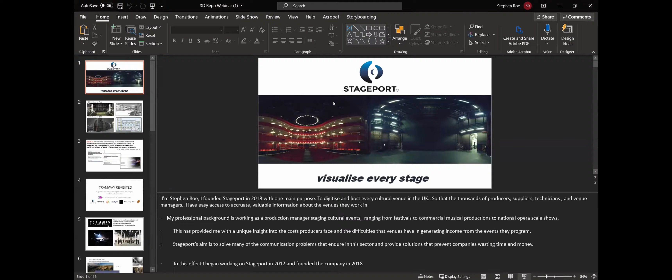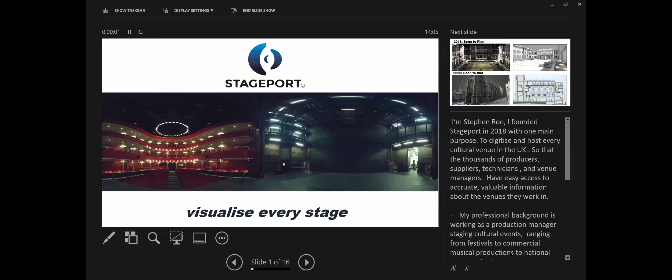Let's kick off. So I'll stop sharing my screen and Matthew, can you please share yours? In fact, Stephen rather - Stephen, sorry. I was going to say, you surprised me there. Yeah, sorry, it'll be over to Stephen. Thanks Justin, and thanks everyone for the opportunity to present today. My name's Stephen Roe. Can I just confirm you're getting the presentation there, guys? We're getting your notes as well, so you're not in... there we go, we're starting again. Okay, sorry about that. You've also got your text on the right-hand side, so we're still not in full presenter mode. Oh right, I am presenting here, so I'm not quite sure why that's happening. Let me just see, I'm sure we can all manage. So you're back to half - you're split 2/3, 1/3. Yeah, I'm not sure why that's happening. Listen, I'll just kick on. Yeah, you crack on, and I'm sure you're not going to be trying to read my notes. There's not much there anyway.

I founded Stageport in 2018 with one main purpose: to digitise and host every cultural venue in the UK, so that the thousands of producers, suppliers, technicians, and venue managers could all have easy access to accurate information about the venues they work in. My background is as a production manager, staging events ranging from festivals to commercial music to National Opera scale work, which has given me insight into the costs producers and venues face as they try to stage events. Stageport's main aim is to solve many of the communication problems that endure in the sector and provide solutions that companies can use to avoid wasting time and money.

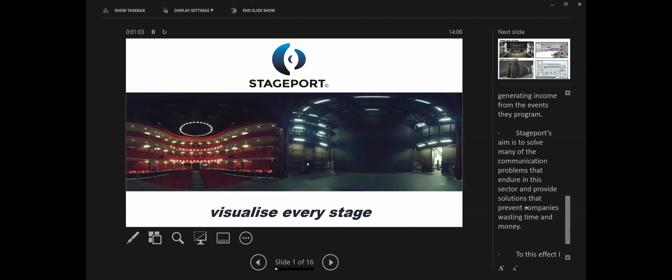Our approach to this problem of providing better communication tools started in 2018, really just as a scan-to-plan service, hosting point clouds online along with the models within those point clouds. Moving on towards 2020, our approach has definitely evolved, and we started looking more at technology geared towards building information modelling.

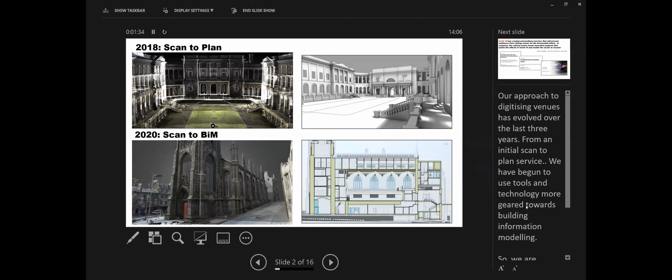Fast forward from 2018 to 2020, and obviously the pandemic struck, and along with every other sector, the cultural sector faced massive problems. The pandemic created extraordinary barriers that prevented audiences from visiting venues. So the research we'd been doing into BIM technology was brought into sharp focus when the pandemic struck in 2020, and we successfully applied to Innovate UK for funding to look at how building information modelling could help in the recovery of venues and producers operating in the cultural sector.

The project funded by Innovate UK was called Tramway Revisited. It involved seven companies working with Tramway, a multi-arts venue in Glasgow.

Tramway is a large multi-art space. It has a busy programme with 5 performance spaces.

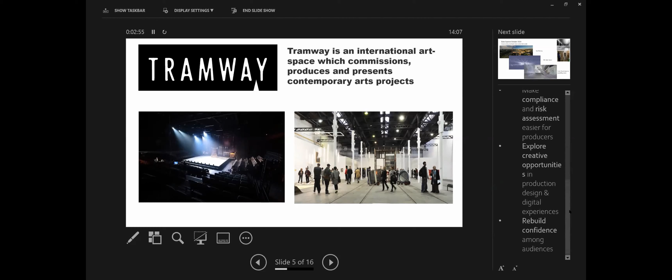The main aim of Tramway Revisited was to improve the sustainability of existing venues, make compliance and risk assessment easier for producers, and then to explore the opportunities in production design and digital experience design using the BIM models that we're aiming to create and host.

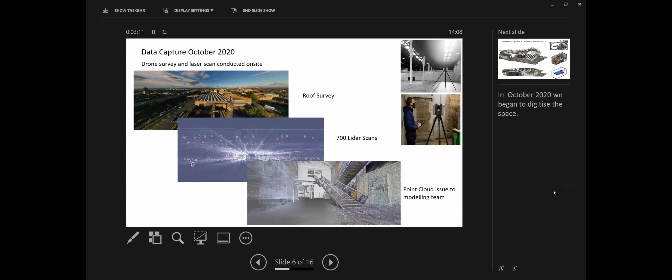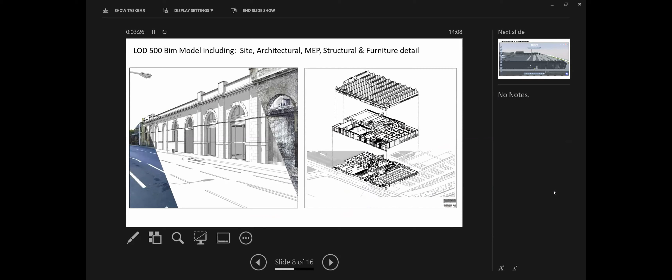The process to digitise Tramway involved some drone surveys, 700 LiDAR scans, and we exported the scans to the CAD team in November 2020. And the guys done an amazing job creating a level 500 BIM model, including the site, architecture, MEP, structural and furniture detail. So it's a fantastic resource.

Once we had the resource on the table, we then had the problem of how do we share this fantastic asset with non-BIM professionals around the table, as well as others that were more informed about how we can use the data that sits behind this model.

So we exported the model to 3D Repo in February to enable easier collaboration between the project team and with Tramway's own staff team.

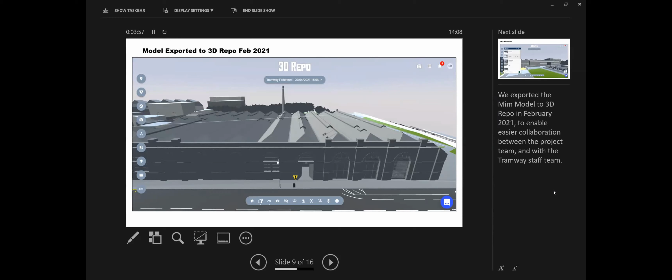The benefits of using Repo are found - again, we're very new to BIM technology ourselves, but we've found that using Repo has got a number of really easy benefits. One is the easy navigation tools within the environment, the ability to raise issues in the model.

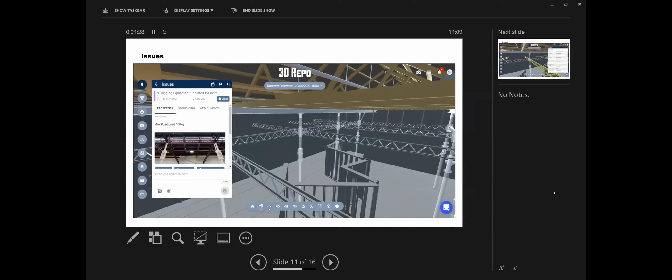The guys are busy planning cultural restart events, so there's installations and shows going into the venue in the next few months. So we're able to raise issues in there linked to the work that's been done on site. We're also able to access structural detail and really leverage the BIM data within the model, and this makes for better communication and better planning all round.

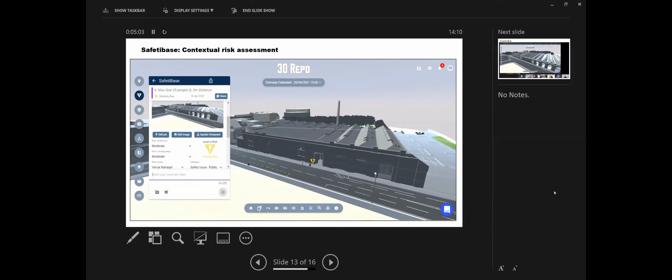What's been really fantastic has been the opportunity to use SafetiBase to provide us with contextual risk assessment. And we've got a couple of experienced health and safety professionals on the team, and they've been really impressed by this application in particular.

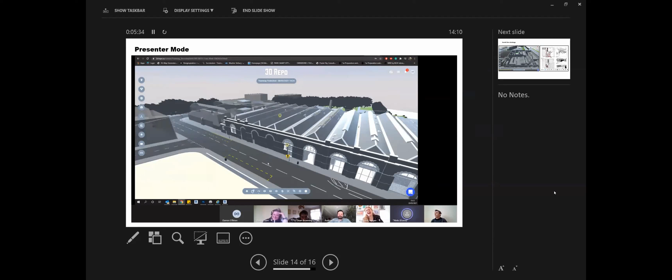One of the things we've managed to achieve through this collaboration has been to enable Tramway to develop their COVID strategy, which is vital in the first phase of the recovery from the impact of the pandemic on venues like Tramway. So being able to collaborate and come up with this 2-metre strategy that allows them to go back to operation is a fantastic outcome.

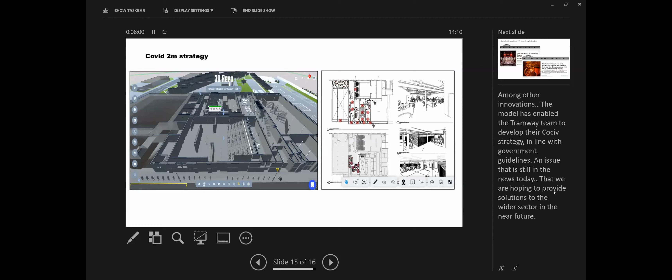And just to put that into context, this is even just this morning - we've still got uncertainty in the sector around how we recover from the impact of the pandemic. So digitising the venue, having the venue up in Repo, has really helped us to get to grips with the problems there, and we're looking forward to continue to use the technology in the months ahead.

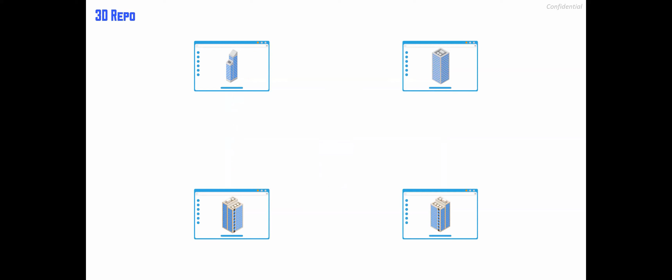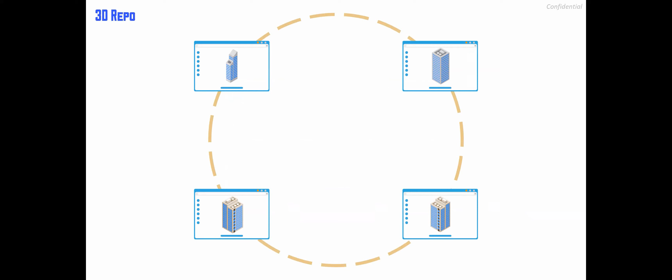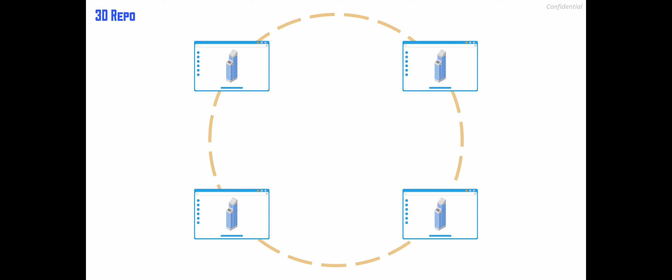So you think about it, okay, well, if that's the case, it's easier said than done probably. How does the scalability of it work, right? How do you make sure that, okay, if you take it from a single meeting room to, let's say, 15 people tuning in and each one of them opening a web browser to look at the BIM model, how do you make sure that the model and information being exchanged is in a circle, so everybody getting the same information, no one gets left out. But most importantly, how do you make sure that everybody's looking at the model that you want them to look at? Because it's so easy to get lost in the environment when you're not familiar with it.

But the most important thing, we're leaving communication right in the heart of it. We want to make sure that it's not a burden, it's actually a new tool that can help you communicate better. Just like all these video conferencing tools we are using to facilitate those meetings where 6 or 7 of us would be together. So how do you make it work, right?

If we look at the technological side of things, presenter mode is something that actually spun out as an idea. And we did the Innovate UK funded project for it, and we had a lot of beta testers and a lot of customers starting to adopt it. But the main issue that we found is the fact that, okay, when you go remote, that means you're going to be running a video, running audio.

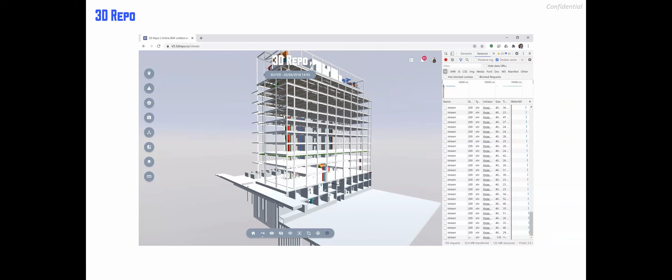So there will be a lot of payload on your network. You'll be downloading a lot of things, and your internet might be under a bit of strain. You may notice in here, this is an example federation, MEP and structural model, and you'll see there are loads of streams, loads of data exchange. You always question yourself, isn't it going to add a degree of complexity and maybe heavy loads on your internet bandwidth? Well, let's not deep dive into this idea without looking under the bonnet of it.

Let's look at the numbers, right? So you'll notice, for instance, the model we looked at earlier is one of the federations from our clients at Wood Wharf Project, Canary Wharf Group. The model we looked at just then was 115 megabytes, right?

But what's really beneficial is the ability, like I said, to put everybody in the driver's seat, right? So you are no longer sat there watching a video like many of you are doing right now and looking at what I'm presenting to you. You're able to interact with it yourself.

And if we look at the graph in here, we'll notice that when we do sound and screen sharing through, let's say, MS Teams, our actual network load is all over the place, right? We suddenly find ourselves in situations where you always ask, do you hear me? The picture is too pixelated, you can't actually see what's happening. But when you just resort to, let's say, a sound call, and instead of watching somebody navigating the model for you, you're being driven within the application itself, it actually reduces your payload across the internet bandwidth.

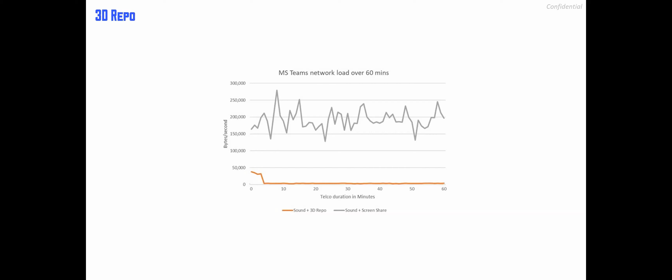So you'll notice, wow, excellent. So the issue that we're resolving here is that we're actually encouraging those individuals to work within that 3D BIM model environment. But most importantly, what we realize is that we are no longer having the same issues of the internet dropping out or you not being able to see the picture.

So it all sounds great. You might want to see it. I'll show you exactly how it works.

So right here, for instance, let's say I have a design coordination meeting. You'll notice there are 2 screens side by side. But this could also be me talking to my colleague who might be sat in Edinburgh or somewhere else, right? So when we dial in, we start our communication channel.

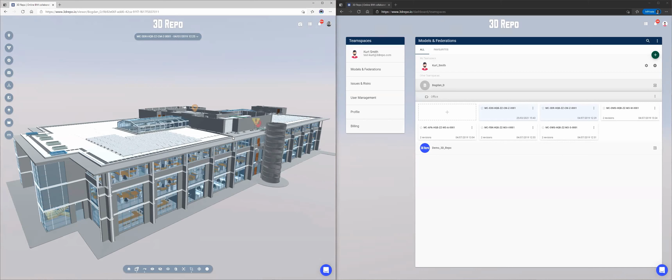And the good thing is, since you are in this environment, for my colleague who doesn't know how to do this whole BIM stuff, and everybody talks about it, and because software deployment is a problem, an issue, there are steep learning curves, I'm going to facilitate that for him. I'm going to make it a lot easier, right?

I'm going to go in and create my design coordination meeting. Let's say today is 29/04/2021. In fact, I'm going to start my presenter mode session, and I'm just going to copy that code and drop it into the description. The good thing is, since we're working in an environment that is not screen sharing, everything is then intact and audited. Right, so this is going to be an in-progress issue, and this is going to be my design coordination.

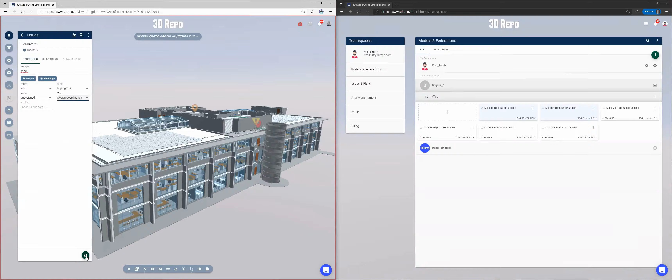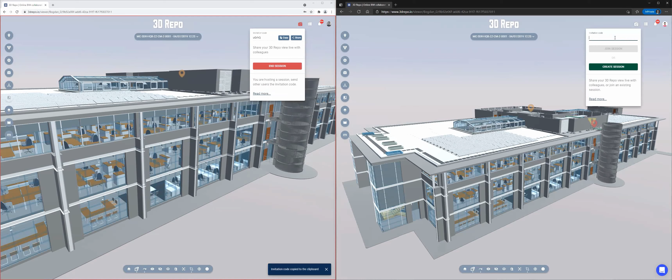So for instance, okay, let's jump into the presenter mode itself, right? We're together in the same meeting, we're trying to figure things out, we're trying to understand stuff. So whilst it's easier for me to navigate the model and things, for others it may not be the case, right? So when I initiate my actual presenter mode, I start my session, I can copy my code, I can share the URL link if I want to, but the other individual can just quite easily copy the code in there and then join the session.

What happens next is that whilst I'm working remotely, I may be communicating with somebody elsewhere. So for instance, let's say I might go and say, actually, do you want to go and have a look at an issue with me, right?

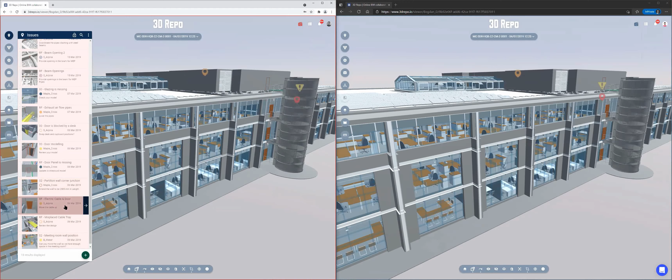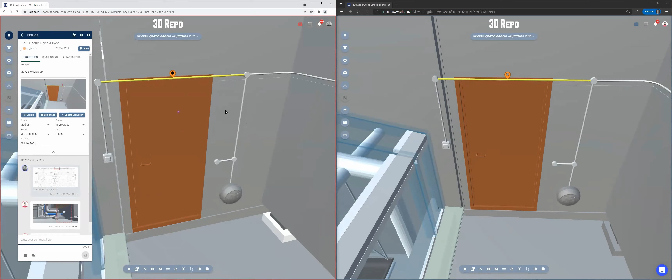There is an issue that I want addressed, so it's this electrical cable and door. When we go there, it's no longer just me showing a screen and the other person looking at it, trying to figure out what it is. It's me navigating the model for them also, so as I fly around, as I'm showing things, they'll be getting exactly the same picture. For instance, I might point out, okay, this is the actual door I'm talking about.

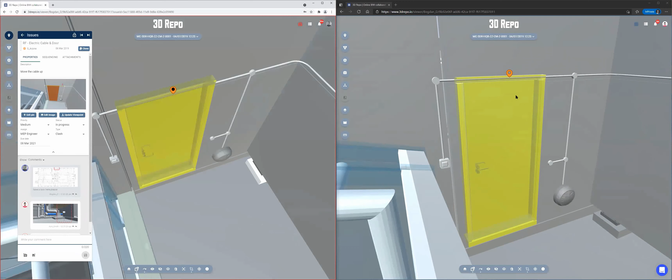When you click on it, the object selection will come through to the other individual as well. And if you point out an issue and say, hey, there's a cable clashing or something else happening, what's really nice is that you can add a level of information exchange that often goes unnoticed. Whilst I'm in this environment, I might say, okay, hold on, I just have a question. If he's saying there's an issue with this cable, why is it coming from that?

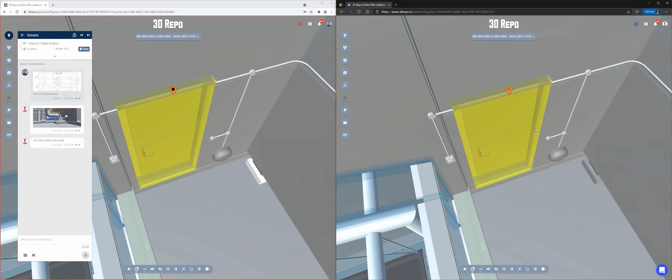I can always leave the meeting, and whilst I'm in the environment, I'm no longer looking at screen share. What I'm able to do next is navigate out and look around the model, and maybe notice another thing and say, oh, actually, there's some sort of ductwork set right in front of this door. I think there might be another issue we want to resolve as well.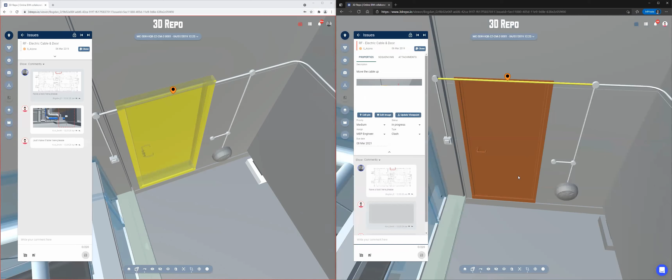The good thing is, when we go back into our issues environment, there's a full audit trail for everything. I might go back in here and point to something else, and say, this is my comment. My comment might not be related to that, but because I'm looking at the BIM model, not your screen share, I might say, actually, have a look in here. This looks rather odd. To me, it looks like there's some sort of MEP equipment in front of the door as well. So we might move the cable, but maybe we need to move the door too, because there's a bigger issue here.

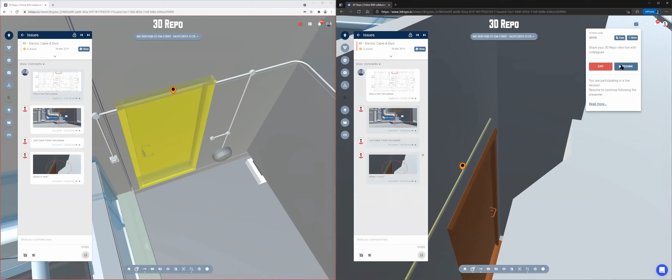So this is the comment that I add, and that comment instantly comes back to me on the other side of the world. Once I've identified something, I might have added extra value to my design coordination. I then go on and say, okay, let's jump back into the environment, let's go back to the meeting so we can crack on, so I don't lose track of the agenda.

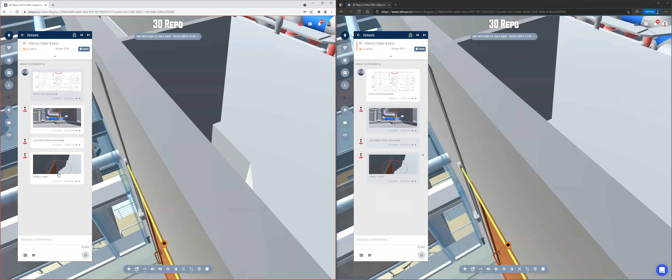The person leading the meeting might say, oh, actually, you are right, there is an interesting comment here, and I want to share that with everyone else. Because everybody else is following me, I can click on that comment and have a look at what that individual is actually trying to articulate. As it goes on, as you all start communicating, you realize it's no longer you throwing suggestions across the room table, and then when you leave the meeting, suddenly scratching your head thinking, what is it we wanted to do. You can always come back to it whenever you want.

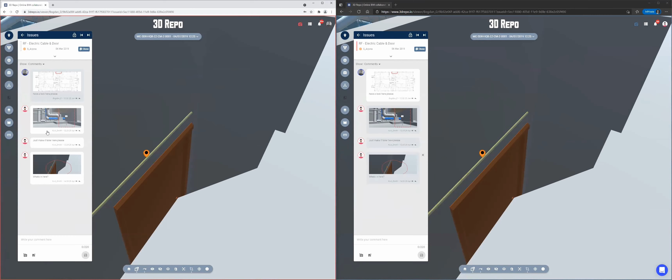Those individuals working simultaneously with you can also, at any moment in time, step away, identify something else, and add some other comment as well. You might say, okay, he's pointing to something else also, let's quickly go and have a look at that. And that's the real value in this.

It's, once again, the ability, at its easiest concept, to drive that BIM adoption with the rest of the project team, not by doing the work for them, but by doing the work with them, and making the actual workflows rather simple and straightforward. They're all live, not too dissimilar to exchanging information on the likes of WhatsApp or Facebook. So there are no steep learning curves, and everything is in the web browser, which we're all used to.

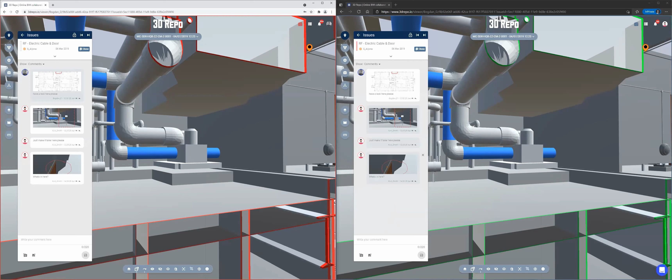Thanks for that, Bogdan. Sort of proving the case for, what is it they say, never work with animals and children and never demo live tech. Very amicably done, sir.

Thank you for the introduction, and thank you to everybody on the call for your time. I'm Matt Gough, Innovation Director for a company called Mace. We are an international construction and consultancy company with a clear purpose to redefine the boundaries of ambition for our industry. We seek to differentiate in three core areas: net zero carbon and how we can help accelerate the built environment's response to the climate emergency; construction to production, changing the business model in which we all operate; and all of that enabled by a transformation in how we manage digital and data within both our business and the industry at large.

Across the globe, our people are adopting a different mindset to develop, adopt and deploy technology across all parts of the project lifecycle. I've been at Mace for 10 years and witnessed rapid change in our adoption of technology, and that change continues to accelerate. Globally, we're becoming more efficient and productive every day through technology, whether flying drones, augmented reality, virtual reality, 360 cameras, sensors, or automation. We're designing, estimating and delivering in digital, delivering better outcomes for our clients as a result.

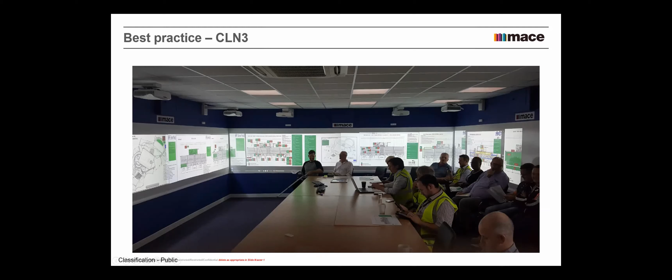What you can see here is our current, or it was 2 years ago, best practice example of what we call a production control room. This is on a hyperscale data center in Ireland, where we digitized, connected and integrated the entire construction workflow from design right through to handover and operation of the building. We made people's work easier and efficient by democratizing data and integrating all the on-site processes using a digital platform, allowing people to work faster and access the right information at the right time. Our intention as a business is to create a standard, repeatable way of rolling that out on any construction project, whether ones we're responsible for delivering, or ones we manage in part through our consultancy business.

In order to do that, we're currently working on one of the Innovate UK demonstrator projects under the Transforming Construction sector deal, called the AEC Production Control Room. Our intention is to build a repeatable, scalable, plug-and-play management reporting system that automates the reporting cycle, enabling high frequency, fact-based project management and control at all levels. We'll be getting data from any systems, whether our clients' and professional teams' proprietary systems, or our suppliers' own tools and software, and automatically collating it into a single reporting focal point for the project. The aim is establishing one source of truth for all, making data accessible anytime via any browser, plus a physical control room location, probably within some form of site office.

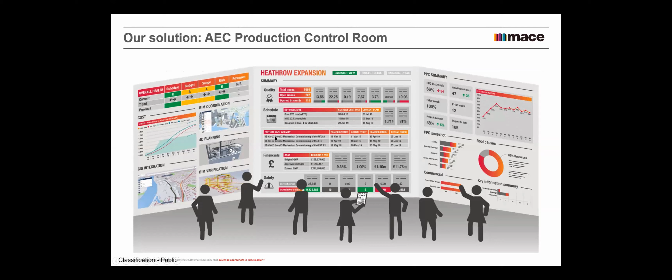Our team, in order to pull this together - I should give a shout out at this point. This is Mace working with 3D Repo, Evercam and Mission Room as our UK startup SMEs, and UCL and Imperial College as our research and academic partners.

So our aim is twofold, really. Can we unlock the business model and transformation required to get data in real time and break that cultural, behavioral barrier around sharing? And can we create a system to be able to take care of the technology part?

And we recognize that technology is only part of the solution here. It's the behavioral and the cultural part that's probably going to make this one win or lose.

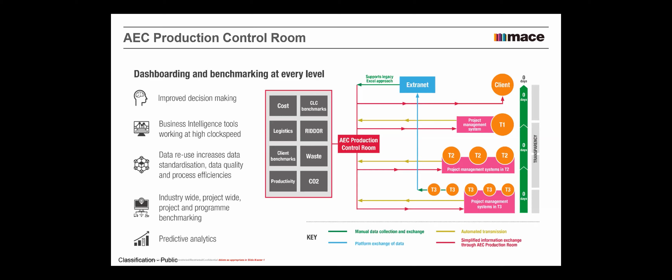But in essence, what we're trying to illustrate here is the fact that through smart API management, a decent approach to cloud, and probably some ways and means of smart machine learning, AI over the top in terms of analytics, we should be able to unlock all tiers of the supply chain through project delivery to create a real-time management dashboard information to allow us to achieve better outcomes for our clients.

Within our Innovate UK project, we have some deliverables, and the intention is that we share these widely with industry. So the three main things that I would say we're sort of shooting for here.

Firstly, as an industry, we've got pretty good at managing design information, with the advent of Uniclass, etc. The continuing onslaught of Autodesk and the BIM platforms and products means that the front end of projects, we tend to be much better now at managing information, as probably demonstrated just then by our friends at 3D Repo. As soon as we get into delivery, all bets tend to be off.

So we're talking about extending the ISO employer's information requirements concept out into project control projects. So how do we actually manage the site in a consistent way? And can we create some standardization around that?

We're obviously not building new systems. We're planning on APIing and working with existing systems. And as we build those APIs, we intend to open source and provide those on GitHub so that the whole of the industry can benefit from them.

And then lastly, if we can unlock project information at this scale, we're working with particularly government clients around how do we start to create the pool or database, let's say, of industry-wide benchmark data to allow the whole industry to get better.

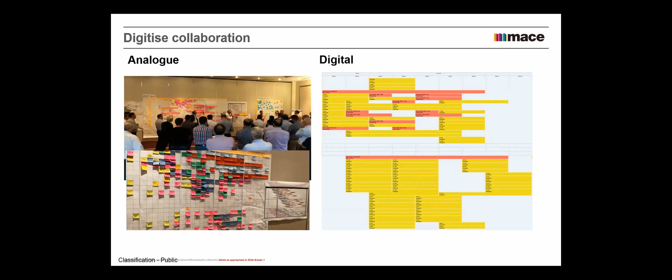We've already made some strides as an industry in terms of how we digitize that. But what we really start to lose when we move from that physical to the digital is perhaps the immersive element of activity. So what we're really aiming at is creating an immersive environment in which all operatives and supply chain partners, etc., can partake.

So here's the first iteration of one of our production control rooms. This is on a project that Mace is currently running down in Paddington. And we're tapping into a few additional things here that we wouldn't have been doing in the past or able to do before this project.

So firstly, the advent of 4D collaboration. So the production control room is tapping into our 4D sequencing. So we're able to use the BIM model more effectively in short-term planning sessions.

There's a huge amount of effort going into enriching data. So the 3D models that we get, and also a lot of the data that the sites generate, is not always at the quality we need at source. So the production control room is really allowing us to perhaps take a bit more control and add context to that data without having to go back to the authoring tools.

And then, the main bit, collaboration and dissemination. So creating an environment such as this where you're able to get people comfortable with what is being proposed on the project, what's happening in terms of sequencing, what key activities, etc., are coming next, and getting comfortable around the plan is proving to be really effective in terms of driving productivity.

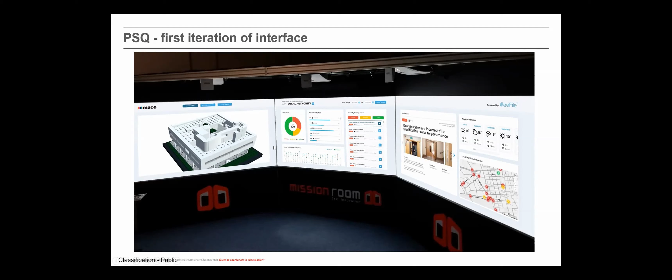It's not easy. I mean, we all work in the industry and we all recognize that our digital transformation and adoption is still, in some respects, in its infancy, but it's getting faster.

Some of the real tricky problems we're trying to tackle here - it's a good reason for using the word elephant - is a lot around the quality of the data and the disconnectedness of the data. There's a huge amount of training and upskilling required for us as an industry in order to create the consistency we need if we're going to unlock the productivity improvements that are on the table. But where we're doing it, the productivity improvements are possible.

Here's some statistics from a project that Mace is working on where we have managed to integrate our data, and we've done our part to address this. As you can see, there's significant ROI in terms of improving productivity as a result of a more connected,

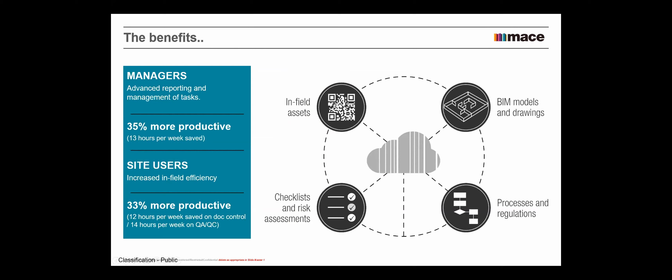holistic view of digital platforms and systems on projects. So that's the dream - we're making good headway. There's always more to be done, but we're very much looking forward to having a successful year and working with 3D Repo and the team to deliver some real meaningful change.

Matt, thanks very much, and thanks for the immersive elephant, which we'll all look out for in future. Even you couldn't say it, see? So, Lawrence, it's over to you to share your screen. Thank you very much, I'm just going to share the screen right now.

Thank you and welcome to the Luminova presentation of Hyperview. I'm Lawrence Matthews, the Managing Director of Luminova. Just a little bit of background about us.

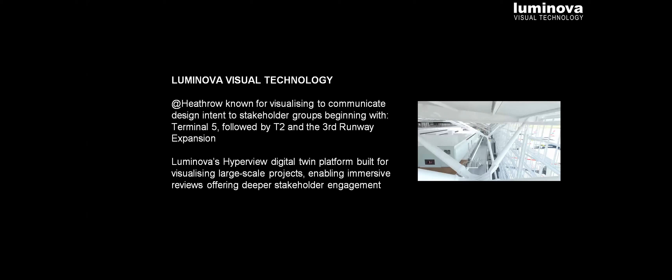At Heathrow, we have worked for a long time, and we're known for visualizing to communicate the design intent to stakeholder groups. We began that with Terminal 5 back in 2005, followed by Terminal 2, which we started when the old Terminal 2 was being demolished, and worked right through the construction program. We also then moved on to the third runway expansion project, working on runways, roads and buildings, all with the purpose to communicate to stakeholder groups.

Fast forward to 2021, Luminova has developed the new Hyperview digital twin platform, which is built for visualizing large-scale projects, enabling immersive reviews and offering deeper stakeholder engagement.

The key points I'm going to run over today are these: one of the main parts that makes it work is the BIM Live Link integration we have with 3D Repo, which helps us handle large schemes. I'm going to show you some high fidelity visuals in a gaming environment in real time, and also some immersive examples, and touch on the distributable package element of this application.

So here's how it works, and for our purposes it begins with models, and these models are either created for or by the client. For Hyperview, those models get pushed into 3D Repo, and then they are federated. Between then and actually creating a desktop application, we need to configure - so we create a BIM Live Link, which is the integration we have to 3D Repo.

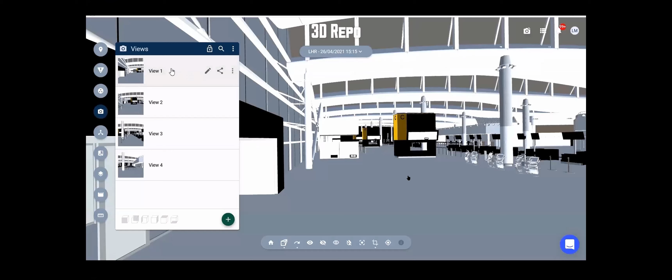So back to the models - we've got models which we pushed into 3D Repo as stage 1, and I'm just going to show you an example of that. Here we have a part of Heathrow Terminal 2, which is being pushed into 3D Repo. We've set up 4 simple views.

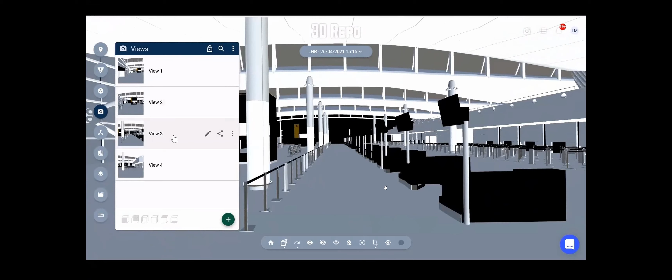You can see quite a lot of gaps here, which we would fill in the Hyperview if that information isn't available. So we're now just moving between these four views or scenes. We're at the fast bag drop at the moment, and we'll end up back at the premium check-in. You'll see a deployed Hyperview version of this in a moment.

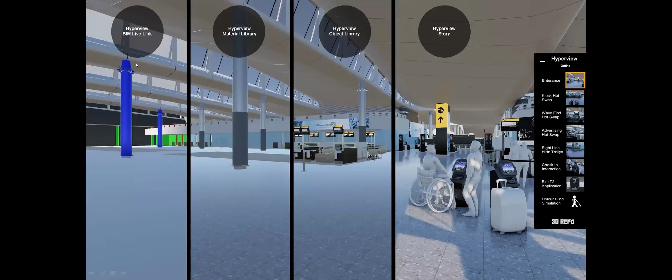The first thing we do is we set up the BIM live link, and then that data from 3D Repo is downloaded into the Hyperview as an instance or a session, and that's what you get first.

What we then do is we allocate materials to the geometrical objects that are downloaded, and then we move on to the Hyperview object library and fill the gaps. What we're really doing there is adding things like media, wayfinding, trolleys, things you're not going to find in the BIM model, or you may, or there might be parts that aren't actually loaded as yet.

And then the final part is telling the story. So what we do here is create an appropriate user interface which guides the user through the story. We add people with motion capture behavior for realism, and of course lighting.

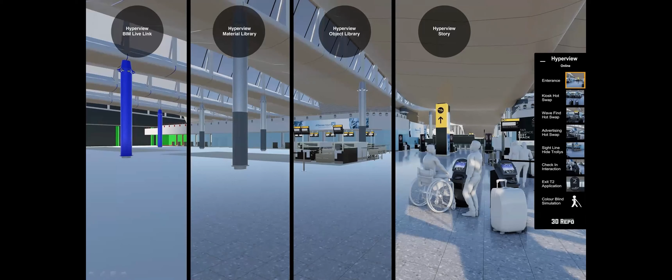To show you an example of a deployed version of this, of the 4 views that we saw just a bit earlier, here we are now in the model with all the materials deployed, lighting, etc. We have 4 fixed views. So it's quite a simple UI, but nevertheless, here's the model in its current format.

As you can see, we've got some slight motion capture behavior over there with these people moving across to the fast bag drop, and we'll end with this particular simple deployment at the premium check-in.

So a more elaborate version, same model, but simply a different deployment telling a more complicated story. Here we've got a number of fixed views, but we can depart from these. We're just using the right-hand cursor to move along this walkway. But now we'll go back to the fixed views to tell a story.

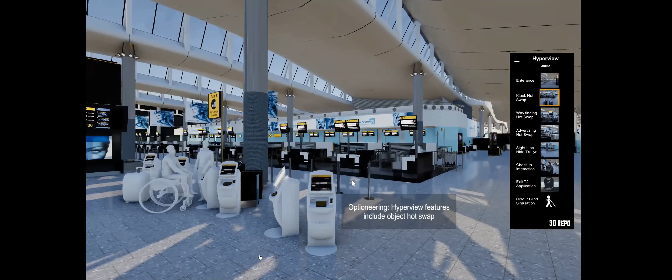And this one's about optioneering. So here you can see we're swapping out materials on these kiosks. We're going to now move forward and test wayfinding.

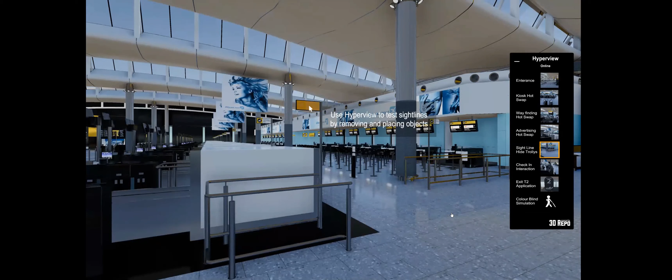Moving right along, we're going to test advertising and media content across the site wide. Test sight lines with just a simple version of it here where we're just removing trolleys and replacing them, but we could be removing and replacing any object. Testing people in the environment, only 3, but there could be many.

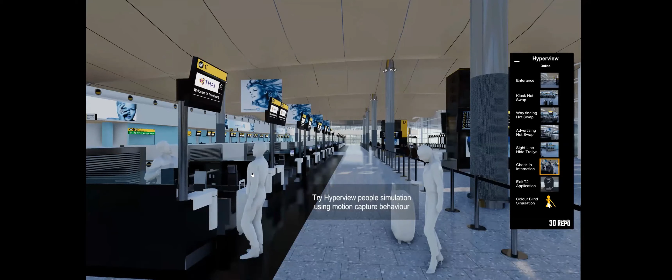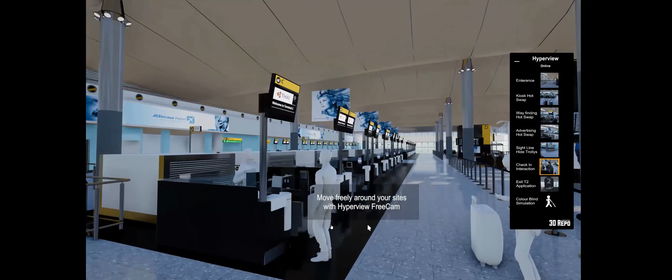This is a special feature that we created, which is to do with a color blindness simulator. So we're testing 2 different types of color blindness of the 4 possible available in that menu, and then back to normal. Now we'll break away from the fixed views and we'll simply explore the site with a free camera.

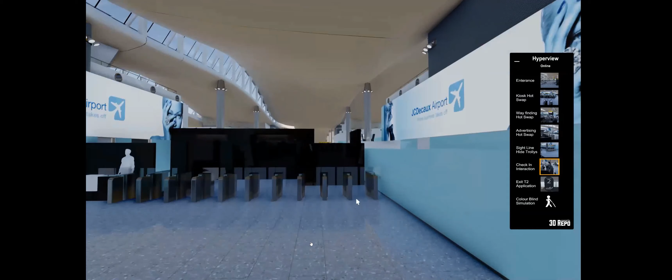We could go straight through to security check here, but we'll draw the line at E-gates and we'll select to go back to the start.

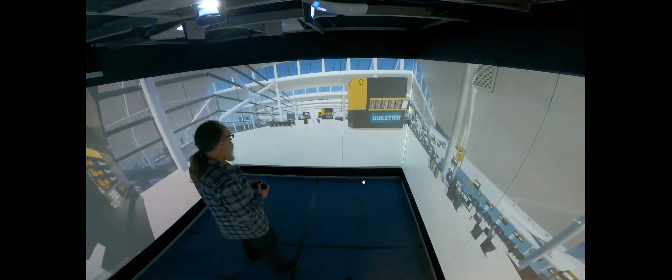And the final deployment that I wanted to show was the fully immersive immersion room example. So here we have the same model, and we're using a further integration, in this case where the Hyperview is integrated with immersion room. So any of the applications that we build could be shown in this way as well, to give you a fully immersive view of your environment.

Using an Xbox controller here to move around freely.

So just as a recap, what we've looked at is the BIM live link, which is key to the link with 3D Repo's models, bringing those large models, those large schemes down into a gaming environment where you have high fidelity visuals running in real time, and the possibility of an immersive view of it too, using immersion room, and the fact that it's a distributable package in that it's an executable program, so it can be shared.

And we think the key project benefits of this is you'll get a deeper stakeholder engagement, which will allow for faster decision cycles and immediate updating. What I mean by that is the models that go up into 3D Repo with the live link are pulled down every time the application starts, down to the Hyperview. And when these models are reviewed or updated, that review will come down as well. So each time you start the application, you'll get basically the most recent version.